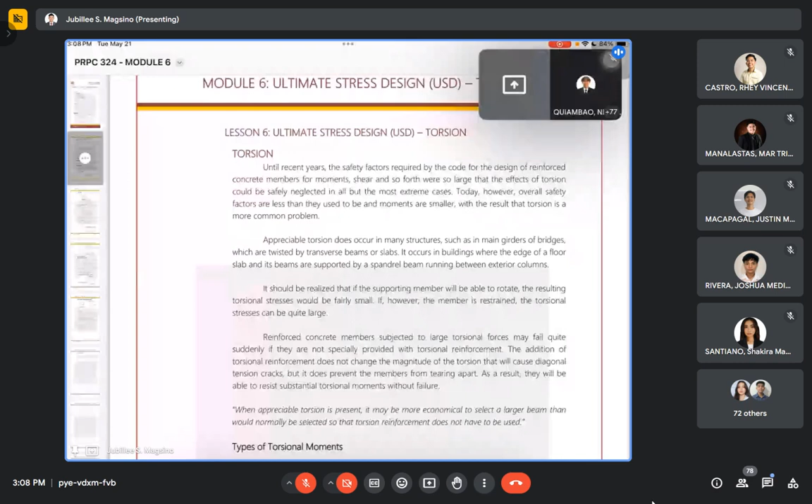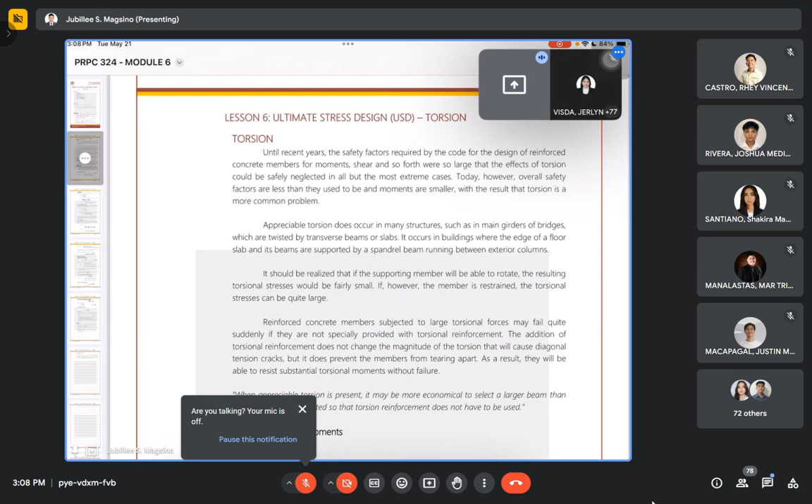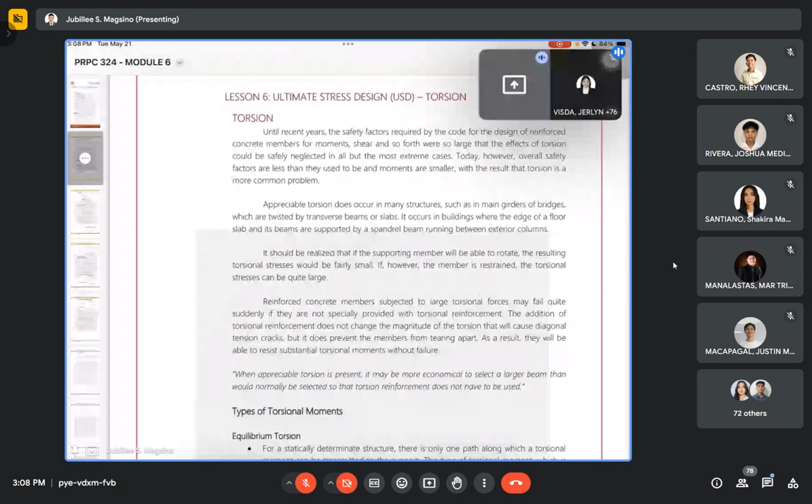Torsion, until recent years, the safety factors required by the code for the design of reinforced concrete members for moments, shear, and so forth were so large that effects of torsion could be safely neglected in all but the most extreme cases. But today, however, all overall safety factors are less than they used to be, and moments are even smaller, with the result that torsion is a more common problem.

Appreciable torsion does occur in many structures, such as in main girders of bridges, which are twisted by transverse beams or slabs. It occurs in buildings where the edge of a floor slab and its beam are supported by a spandrel beam running between exterior columns. It should be realized that if the supporting member will be able to rotate, the resulting torsional stresses would be fairly small. If, however, the member is restrained, the torsional stresses can be quite large.

So ang mangyari class, maglagay man tayo ng torsional reinforcement, hindi naman to magbabago yung value ng ating torsion or tinatawag nating ultimate value of the torsion. So same case lang ng class, ang mangyayari lang po, magiging lang po siyang extra support para kung sakali class mag-fail when it comes into torsional moment, meron pa din tayong support na kung saan makapag-support dun sa atin pong reinforced concrete beam.

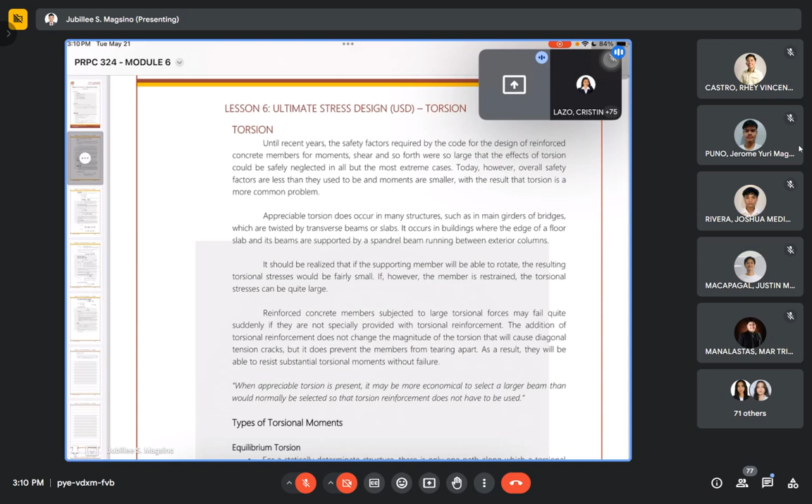We do also have types of torsional moments. So we have equilibrium torsion and compatibility torsion.

So for equilibrium torsion class, for statically determinate structure, there is only one path along which the torsional moment can be transmitted to the support. So this type of torsional moment, which is referred to as equilibrium torsion or statically determinate torsion, in other words, cannot be reduced by redistribution of internal forces or by a rotation of the member. So the member, therefore, must be designed to resist the full calculated torsional moment.

Next, we have compatibility torsion. So the torsional moment in a particular part of a statically indeterminate structure may be substantially reduced if that part of the structure cracks under the torsion and gives or rotates. The result will be a redistribution of forces in the structure. This type of torsion is referred to as statically indeterminate torsion or compatibility torsion, in the sense that the part of the structure in question twists in order to keep the deformations of the structure compatible.

We do also have torsional capacity of a member. Wait lang class.

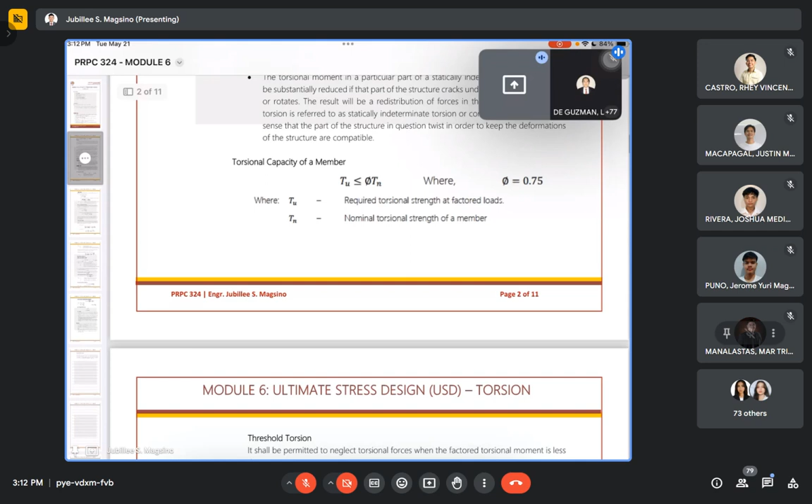Okay, so torsional capacity of a member, so meron tayo dyang TU should be less than or equal to the phi Tn, wherein yung value ng ating phi or yung reduction factor natin is 0.75 din, kagaya lang siya ng ating pong nasa module 5, yung ating pong last discussion. Wherein yung ating pong TU is the required torsional strength at factored loads, o yung tinatawag nating ultimate value of torsional strength. And then Tn, kapag nakakita tayo ng sub na N, basically that's nominal torsional strength of a member.

Next, we have threshold torsion. So sabi dito, class, it shall be permitted to neglect torsional forces when the factored torsional moment is less than. So meron tayong dalawa dyan, class. For non-pre-stress members, so meron tayong value na ating threshold torsion, which is less than or equal to the formula of phi lambda square root of f prime c all over 12 multiplied by the value of ACP squared all over PCP. And for non-pre-stress members naman, class, subjected to an axial tensile or compressive force.

So kung dun sa nauna, class, non-pre-stress members lang siya, wala siyang binanggit if subjected ba siya sa axial or compressive force, ang gagamitin is yung nauna. Pero if sinabi sa problem, class, subjected yan sa ating pong axial tensile or even sa compressive force, gagamitin natin is yung ating pangalawang formula.

So meron tayong TA, should be less than or equal to the value of phi lambda square root of f prime c all over 12 multiplied by the quantity of ACP squared all over PCP multiplied by the square root of the quantity of 1 plus NU all over 0.33 AG lambda square root of f prime c.

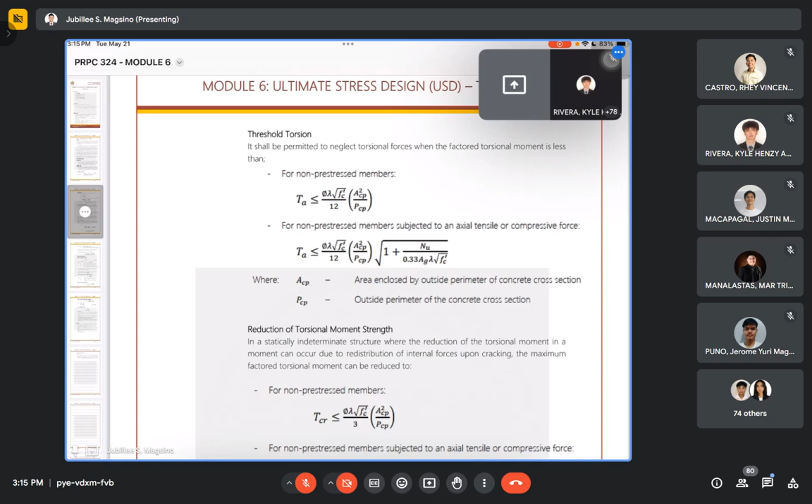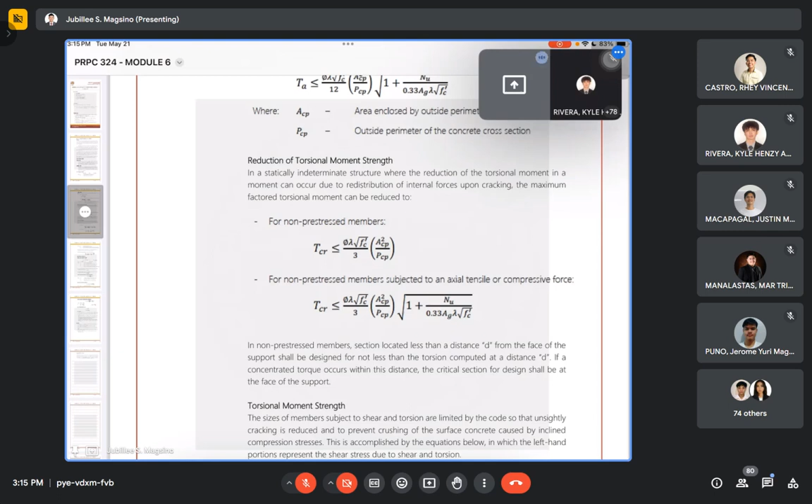Next, the reduction of torsional moment strength. In a statically indeterminate structure, the reduction of the torsional moment can occur due to the redistribution of internal forces upon cracking.

So the maximum factored torsional moment can be reduced to, meron din tayong formula dyan, class. We have for non-pre-stress members, meron tayong TCR should be less than or equal to the value of phi lambda square root of f prime c all over 3 multiplied by the quantity of ACP squared all over PCP.

Tapos kapag naman sinabi sa problem, subjected yan sa ating axial, tensile, or even compressive force, gagamitin natin yung pangalawang formula. So we have TCR should be less than or equal to the value of phi lambda square root of f prime c all over 3 tapos ACP squared all over PCP.

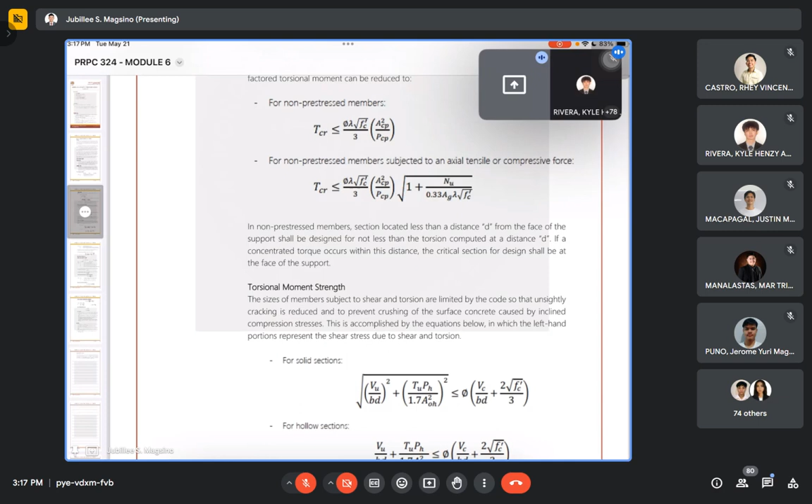Usually, class, dumadagdag lang naman dito is yung value ng square root o yung formula na may square root. Okay? Pero in non-pre-stress members, class, section located less than the distance d from the face of the support shall be designed for not less than the torsion computed at the distance d. So, in a concentrated torque occurring within the distance, the critical section for the design shall be at the face

of the support. Next, we have torsional moment strength. So the sizes of members subjected to shear and torsion are limited by the code so that unsightly cracking is reduced, to prevent crushing of the surface concrete caused by the inclined compression stresses.

So this is accomplished by the equations below, in which the left-hand portion represents the shear stress due to shear and torsion. So ibig sabihin class, itong mga nasa left part, itong mga square root, VU, mga ganyan, yan po ang nagre-represent sa ating pong shear stress due to shear and torsion.

Tapos ikino-compare natin sila sa ating pong quantity na nasa right. So dapat ang mga value na nakuha natin sa left ay hindi lalagpas doon sa value na meron tayo sa right. Okay? Kung lumagpas man sila, ang kukunin nating value ay yung nasa right. Okay? Kung equal man sila, ang kukunin pa rin nating value is yung nasa left.

So for solid sections, class, meron tayong square root of quantity of VU over BD squared plus quantity of TU PH all over 1.7 AOH squared, squared. So it should be less than or equal to the value of quantity of VC all over BD plus 2 square root of f prime c all over 3.

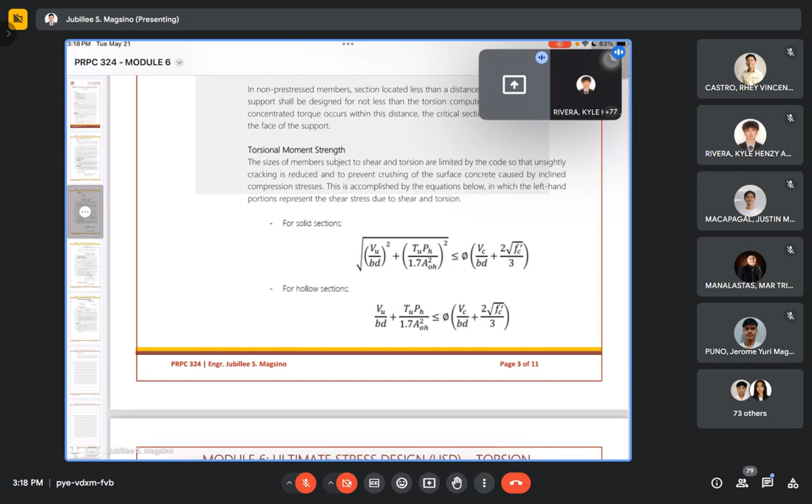So tapos meron din tayo for hollow sections. So for hollow sections naman class, ang parang nagbago lang, tatanggalin mo yung square root at saka yung pagkaka-squared. So parang ganun lang.

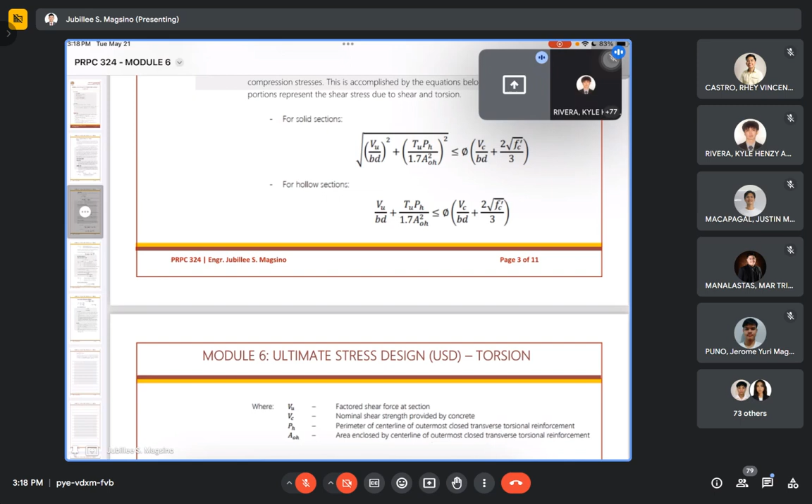Wherein, yung ating pong VU dito, a factored shear force at the section or yung ultimate value ng shear. Tapos nominal shear strength provided by the concrete, VC pa rin yon. Tapos pag may nakita kayong VN, that is nominal value of shear strength.

Pagkatapos naman class, dito naman po, we have the perimeter of centerline of the outermost closed transverse torsional reinforcement. And then yung ating pong AOH, it's the area enclosed by the centerline of the outermost closed transverse torsional reinforcement.

So paano nga ba yung class? Sige, try natin. So halimbawa, meron tayong... yan pangit.

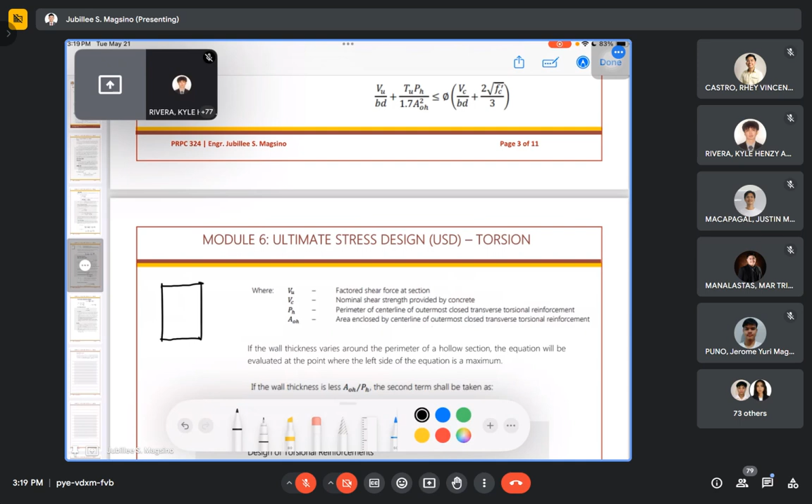So meron tayong, kunyari, height ni beam, sabi ko kanina it's 700. Tapos yung ating pong width ni beam is 400 mm.

So paano nga ba natin makukuha yung pH? Paano ba natin makukuha yung AOH? Halimbawa, ang binigay na value ng ating pong concrete cover is 100 mm. So ibig sabihin class, draw tayo ng ganito. Meron tayong concrete cover dito sa ating side, sa ating taas, and side dun sa baba.

So ibig sabihin, this is both 100 mm. So ililes natin yan sa ating 700. Ang matitira na lang dito sa gitnang part natin, it's 500 mm. Next, ganun din sa ating pong base, tig 100 din to class. So ibig sabihin, ito na lang class ay 200 mm.

So paano nga ba natin makukuha yung pH? Gaya lang ng formula natin kanina, sa pH class, si pH makukuha yan 2 multiplied by, paano to class? Kung kanina buo class, pagdating po kay pH, i-consider na lang natin is yung nasa gitna. Ibig sabihin, makukuha natin si pH 2 multiplied by 200 plus 500. Ganyan natin makukuha si pH.

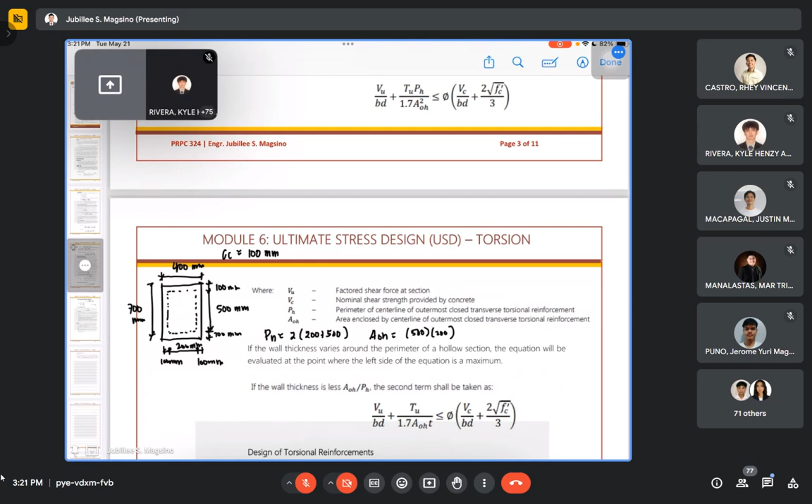Take note, class, that if the wall thickness varies around the perimeter of a hollow section, the equation will be evaluated at the point where the left side of the equation is maximum. So if the wall thickness is less, AOH over pH, the second term shall be taken. Kung ang value po ng ating pong quantity ni AOH all over pH ay ang tawag doon na maximum,

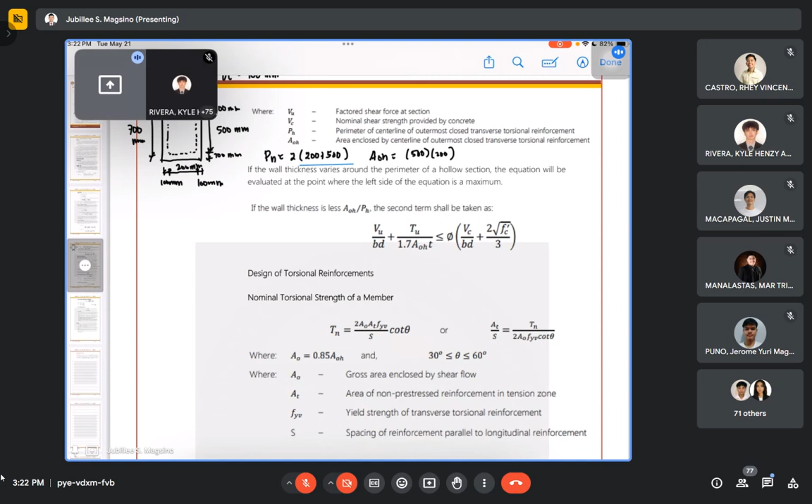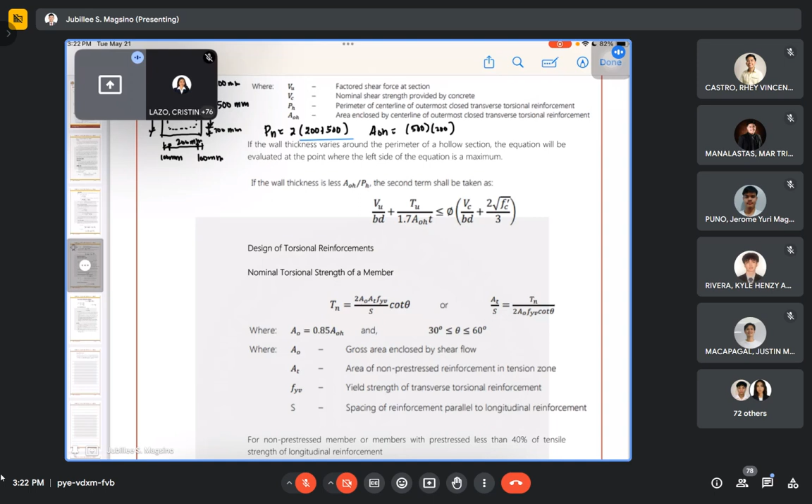Ang gagamitin natin classes yung ating VU over BD plus TU all over 1.7 AOHT. It should be less than or equal to the value of phi multiplied by the quantity of VC over BD plus 2 square root of F prime C all over 3.

Next, pagdating naman sa design class, meron din tayong consideration dyan class. So we have design of torsional reinforcement. We have nominal torsional strength of a member, yung ating pong TN.

Ang formula natin dyan class, we have 2AO multiplied by AT FYV all over S multiplied by cotangent theta. Or pwede natin makuha yung class, i-rearrange lang natin AT all over S equals to TN all over 2 AO FYV cotangent theta. Okay? Wherein yung value ng ating pong AO, it should be 0.85 AOH.

So makukuha natin yung AO natin class, kinakailangan muna natin kuhanin yung value ni AOH. Right after natin makuha yun, i-multiply lang natin, i-reduce lang natin into 0.85 or 85%, makukuha na natin yung AO. Yun yung tinatawag natin gross area enclosed by the shear flow.

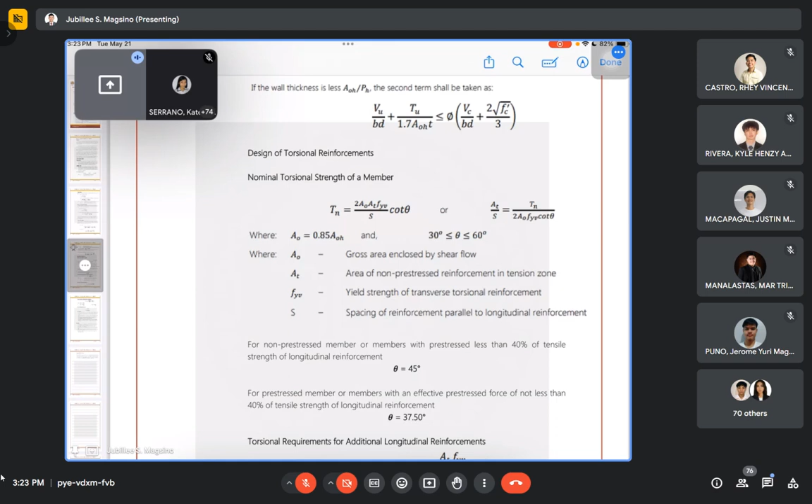Take note, dapat yung ating pong theta is between the value of 30 degrees and 60 degrees, hindi siya bababa sa 30, hindi rin siya tataas sa 60. Dapat nandun lang siya sa range na iyon. At AT, it's the area of the non-pre-stress reinforced in tension zone. FYV, yield strength of the transverse torsional reinforcement. At S, kagaya lang ating shear class, we have spacing of reinforcement parallel to longitudinal reinforcement.

So meron din tayong value ni theta dyan class. For non-pre-stress members or members with pre-stress less than 40% of tensile strength of longitudinal reinforcement, ang gagamitin nating value ni theta is 45 degrees. Pero if ang ating pong member is pre-stress member or member with an effective pre-stress force of not less than 40% of tensile strength of longitudinal reinforcement, ang value ni theta is 37.50 degrees.

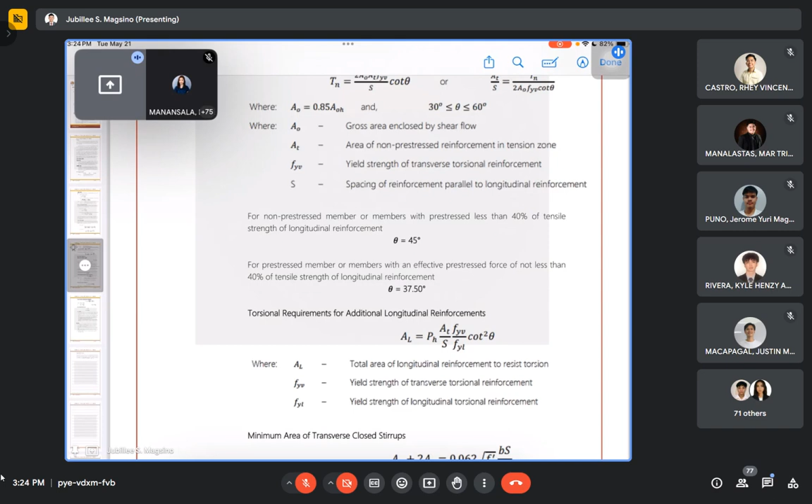Next, we have torsional requirements for additional longitudinal reinforcement or yung tinatawag nating value ni AL. AL is equal to PH AT over S multiplied by FYV all over FYL cotangent squared theta. Yung AL natin class, that will be the total area of longitudinal reinforcement to resist torsion.

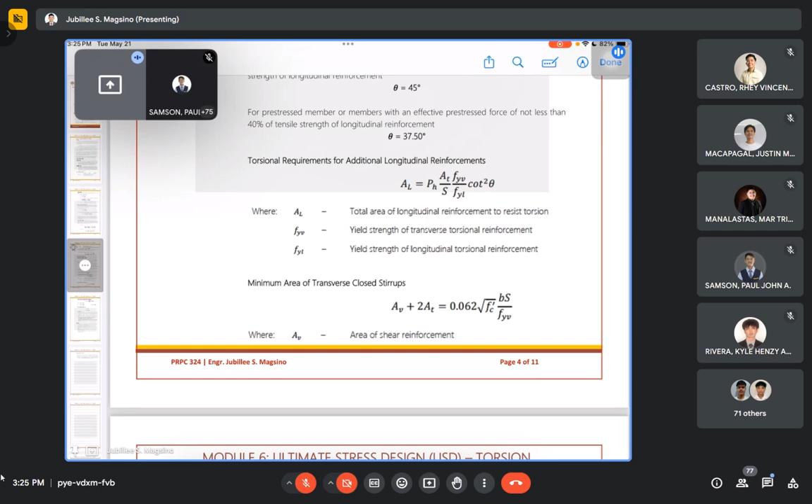Tapos yung FYV, same pa din class. At yung FYL, nadagdag natin class, yield strength of longitudinal torsional reinforcement. Kumbaga ito yung parang kung doon sa ating pong FYB, kino-consider natin doon is the transverse. Pagdating kay FYL, it's the longitudinal torsional reinforcement. At meron din tayong tinatawag na minimum area of transverse closed stirrups.

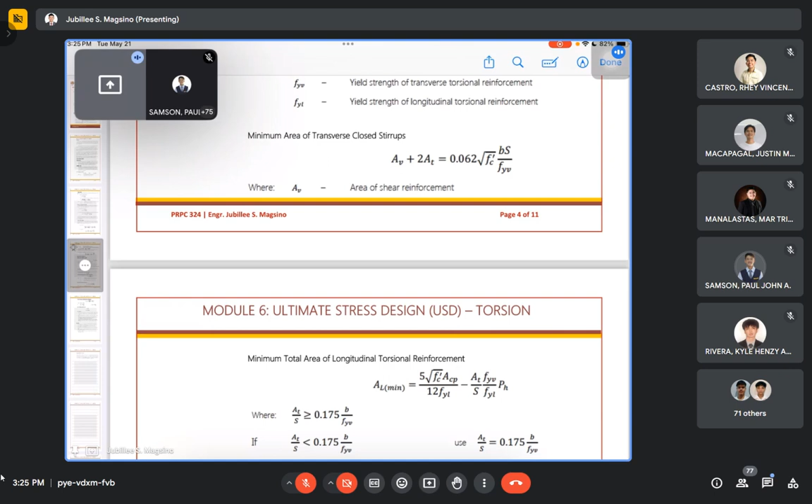We have AV plus 2AT over S is equal to 0.062 square root of F prime C times BS all over FYV. AV is the area of shear reinforcement. And then we have the minimum total area of longitudinal torsional reinforcement.

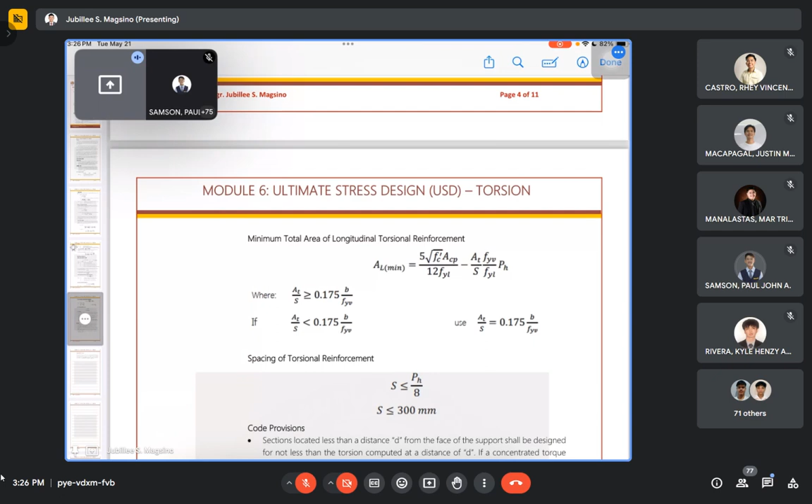So we have AL min is equal to 5 square root of F prime C multiplied by ACP all over 12 FYL, minus the quantity AT over S multiplied by PH, multiplied by FYB over FYL. Wherein the value of AT over S should not be less than 0.175 B over FYV. But in case it becomes lower, what we use is the value of 0.175 multiplied by B over FYV, just in case our AT over S becomes lower.

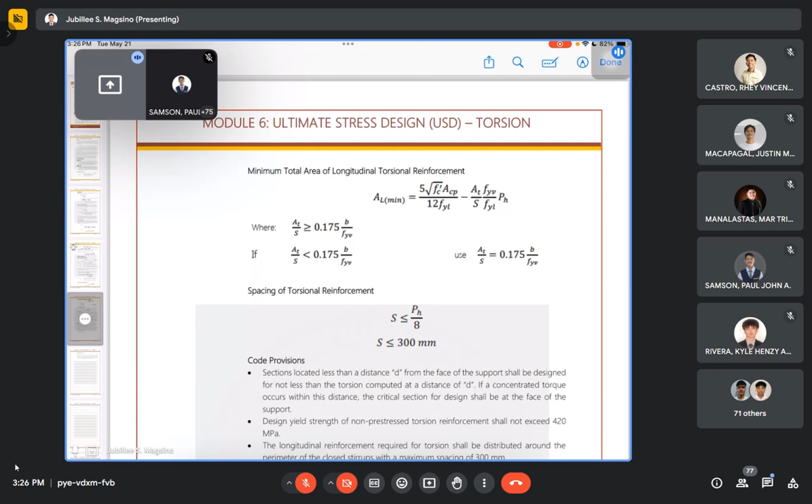And then lastly, for spacing of the torsional reinforcement, we only have two conditions: S is equal to PH over 8, and S is equal to 300 millimeters. Unlike in shear where we solve for several values and pick the smallest as our maximum spacing, for torsional reinforcement we only have two: PH over 8 and 300 millimeters.

So we have two sample problems under torsion. For today, let's discuss example number 1.

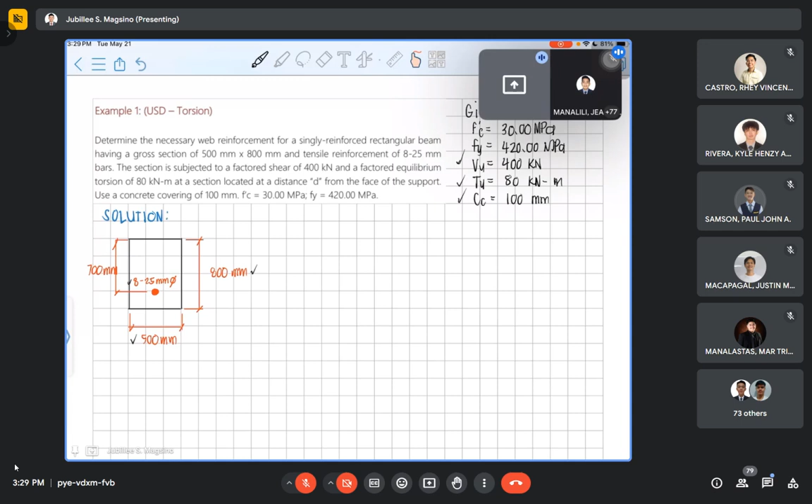So use a concrete covering of 100 millimeters. So we are given our CC which is 100 millimeters. We're also given F prime C which is 30 megapascals, and Fy which is 420 megapascals. What are we asked to find? We have to determine the necessary web reinforcement for a singly reinforced rectangular beam.

Necessary web reinforcement means what we need to find is the value of web reinforcement, or the value of our S. So let's proceed with the solution. Let's start with step 1.

So for step 1, class, we have to first check the shear reinforcement. So how can we solve or check our shear reinforcement? What do we usually solve first when it comes to shear reinforcement?

This is always the first thing we solve, class, the value of VC. VC, right? Wherein our formula is 0.17 lambda square root of F prime C BWD.

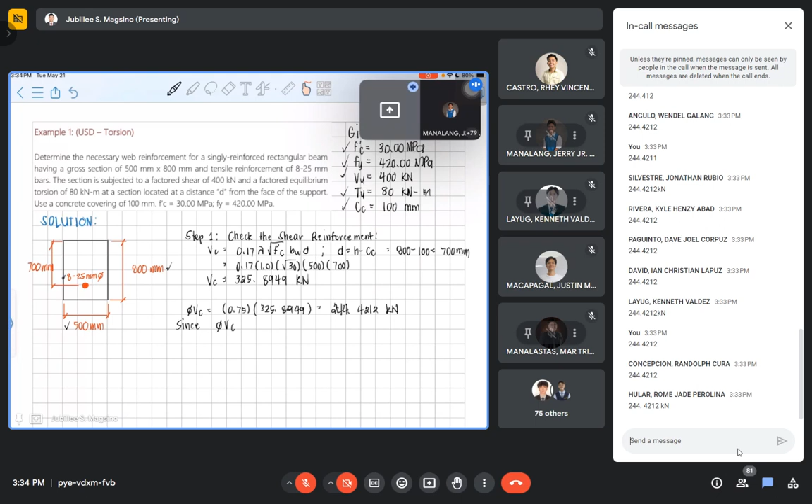Since φVc is less than Vu, tama? Mas mataas si VU, 400, kaysa sa kay φVc na 244. Therefore,

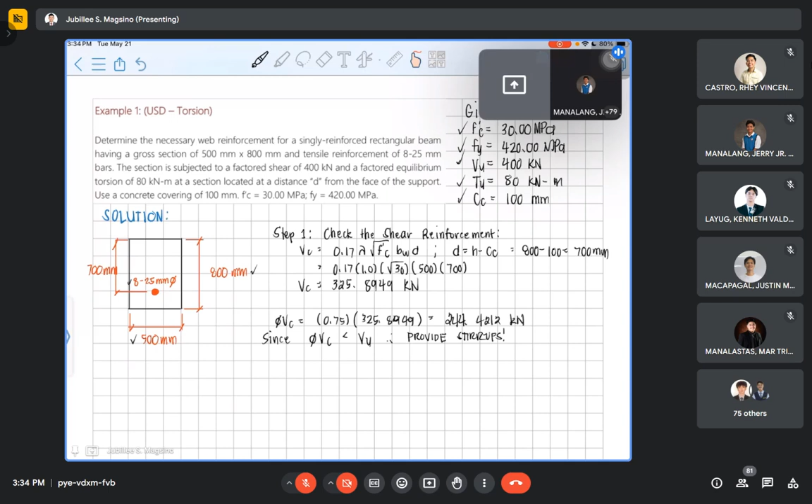provide stirrups. Okay? Natatandaan pa, class? So after step 1, class, kapag na-check na natin if kinakailangan natin ng stirrups, then proceed tayo with step 2.

Okay? So kay step 2 naman, class, okay. For step 2, after natin ma-check kay shear reinforcement, i-check naman natin siya kay torsional reinforcement. So check for torsional reinforcement. Pero paano nga ba natin ma-check yung kanyang torsional reinforcement?

So sisolve muna natin, class, yung value ni ACP at saka ni PCP. So we have ACP. Paano nga ulit makuha si ACP? It's base times height, tama?

Ano ba ang base natin? 500. Ano ba ang height natin? 800. So ano ang value ni ACP natin, class? Yeah, it's 400,000 mm squared. That's area, ha?

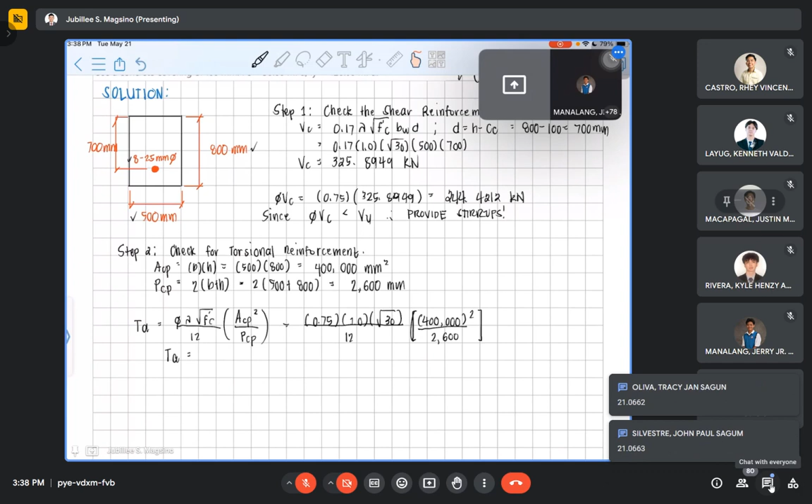21.0663. It's 21.0663. Tanong, ano ang unit? Kilonewton meter. Okay?

So i-compare natin yan sa value ni TU, which is 80 kilonewton meter, tama? Since TU is greater than the value of your TA, which is 80 kilonewton meter, greater than the value of your TA, which is 21.0663 kilonewton meter. Therefore,

provide torsional stirrups. Okay? So na-check na natin siya under shear, tapos na-check na natin siya under torsional, tapos nalaman natin kailangan ng stirrups.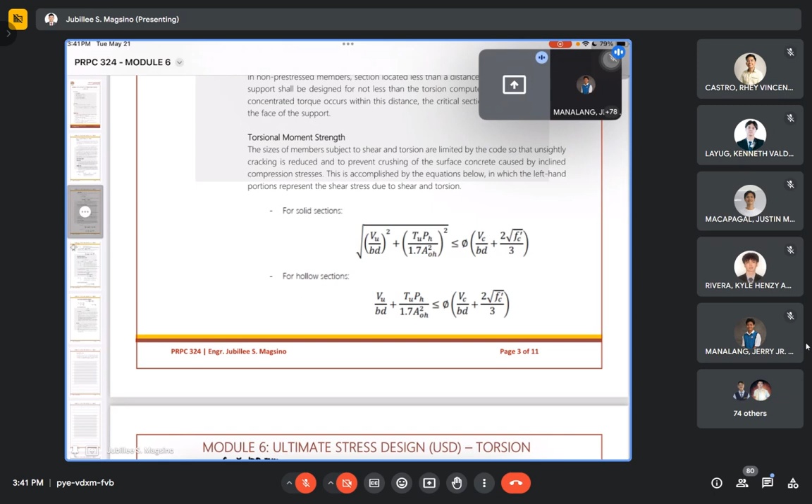Balik tayo dito, class. Yan. Torsional moment strength. Solid ba or hollow? May binanggit ba sa problem na hollow tayo? May binanggit ba sa problem na solid tayo? So upon reading the problem, class, wala siyang binanggit, it's either solid or hollow. So ibig sabihin, in other term, nasa solid section tayo. So since nasa solid section tayo, ang gagamitin natin is for solid sections.

Tama? So gagamitin kong formula niyan is yung naunang formula, which is for solid sections. Which is square root of VU all over BD squared plus TU, pH, all over 1.7 AOH squared, tapos may squared, greater than or equal to VC all over BD plus 2 square root of F prime C all over 3. Okay? So kung papansinin natin, class, meron tayong pH at saka AOH dito sa formula.

So kinakailangan muna natin silang kunin. So paano na ba natin kukunin yon? So halimbawa, yan yung beam natin. So meron tayong height ni beam which is 800. Tapos meron tayong width ni beam na 500. So kunin natin yung nasa loob.

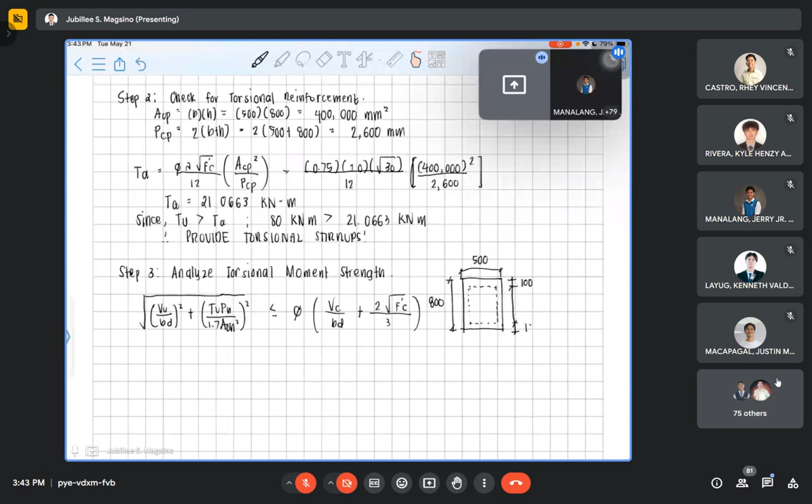Tapos deduct natin yung ating pong concrete cover na 100. So meron tayong 100 dito, meron tayong 100 dito. Same as true with our width. Meron tayong 100 dito, meron tayong 100 dito. Ibig sabihin, meron na lang tayo dito 600. Tapos dito meron tayong 300.

So kunin natin si AOH. Para makuha si AOH, we have to multiply 300 kay 600. So meron na tayong value ni AOH which is 180,000 mm squared. How about si pH?

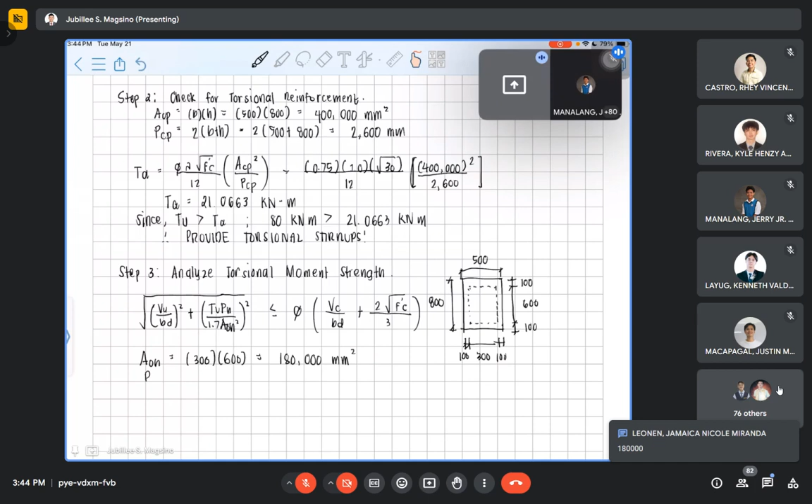So pH, class, 2 multiplied by 300 plus 600. So ano ngayon ang value ni pH? 1,800 mm. And take note, class, na since nag-reduce tayo ng concrete cover, automatically ang value ni ACP at ni PCP is always larger than the value of your AOH and pH. Okay? Next.

So, substitute tayo ng values. So, square root of VU. Ano ang VU natin? 400 kilonewton, tama? Since naka-mm tayo class, convert natin yung mga naka-kilonewton into newton. So, 400 times 10 raised to 3. Tama? From kilonewton, gawin natin newton, multiply ng 1,000. All over base, 500 times your depth which is 700. Huwag tayong papalito ha, baka ang nilagay niya dito height, the depth which is 700 squared plus yung ating value ni TU.

So, TU torsional moment yan. So, ibig sabihin under kilonewton meter. So, convert natin yan into newton mm. So, magmumultiply tayo ng 1 million. Tama? Times 10 raised to 6. So, we have 80 times 10 is to 6. Tapos, multiply natin yan kay pH which is 1,800 mm. All over 1.7. Tapos, multiply natin yan kay 180,000 mm squared. Okay? Tapos, naka-squared pa yan.

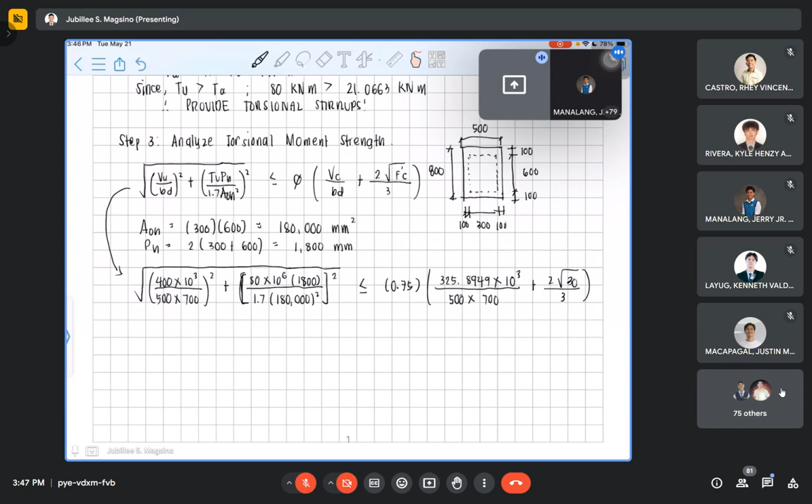Here. So, ano ang value ng ating nasa left side, class? Ano ang value ng ating nasa left side? 2.8533. So we have 2.8533. How about yung ating nasa right side? Kailangan mapatunayan natin yung nasa right side natin mas mataas kumpara dun sa value ng ating nasa left side. 3.437. 3.4369. 3.4. It's 3.4369. So, ibig sabihin, class, therefore,

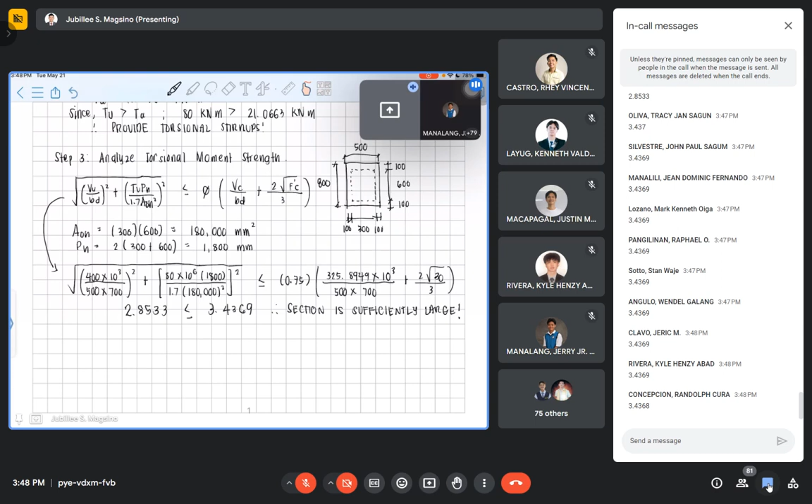Section is sufficiently large. Ibig sabihin, kaya nang i-handle yung ating pong value ni ultimate torsional strength. Okay? So, done tayo with step 1, step 2, and then nag-analyze na din tayo ng torsional moment strength, and then napatunayan natin that section is sufficiently large. Proceed tayo with step 4.

And step 4 tayo, class. Under step 4, we have to identify the required area of torsional reinforcement. Identify the required area of torsional reinforcement. So, paano nga ba yung class? Meron tayong formula doon, tama? Kung babalikan natin, ito yun. Ito yan. Yeah. We have Tn is equal to 2AO AT FYV over S cotangent theta.

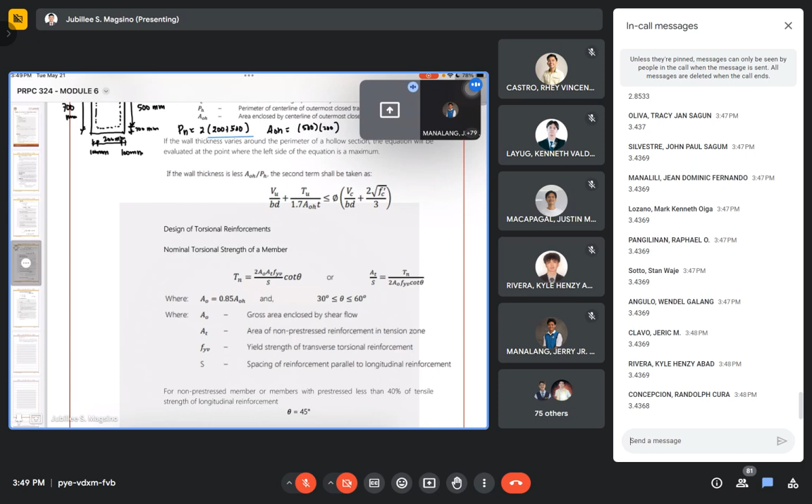So, yan yung gagamitin natin. So, we have Tn is equal to 2AO AT FYV all over S tapos cotangent theta, or we have AT all over S is equal to Tn all over 2AO FYV cotangent theta. Okay.

So, kuhanin muna natin ang value ni Tn. Tama? Kasi walang given na Tn. Pero alam ko, pwede natin makuha si Tn kasi meron tayong given na Tu. Kasi kung titingnan natin, kung meron tayong Vu, yan, kung meron tayong Vu is equal to φVn, it also applies with Tu is equal to φTn. Tama? And then to solve for your Tn, ang gagawin lang natin, we have to divide Tu sa ating pong φ, which is yung reduction factor natin. And meron tayong Tu, tama? That is 80 kilonewton meter all over 0.75. So, ibig sabihin, kayang-kaya natin kuhanin si Tn, which is 106.667 kilonewton meter.

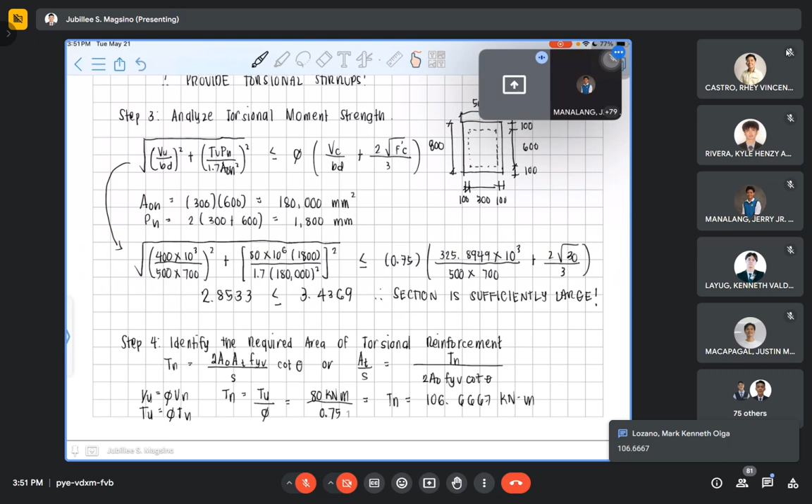So basically, meron na tayo lahat given. So pwede na nating masolve yung area of the torsional reinforcement. Tama? Ayan. Continue natin dito, class. Next naman natin kunin is yung isa pang unknown. Si AO pala ay unknown pa kasi ang nakuha pala natin kanina is the AOH.

Tama? Pero may binigay ang ating formula na para makuha natin ang ating value of your AO is we have to reduce it 85%. So, ibig sabihin, to solve for your AO, you have to multiply 0.85 kay AOH. 0.85 multiplied by 180,000 mm squared. So, ano ngayon ang value ni AO? It's 153,000 mm squared. Okay?

And since kinakailangan din natin ng value ni theta dito, walang ibinigay na specific ang problem. So para safe tayo class, always use the value of your theta or assume that the value of your theta always is equal to 45 degrees. Okay? Wait lang class, tumutulo na yung wait lang. Okay.

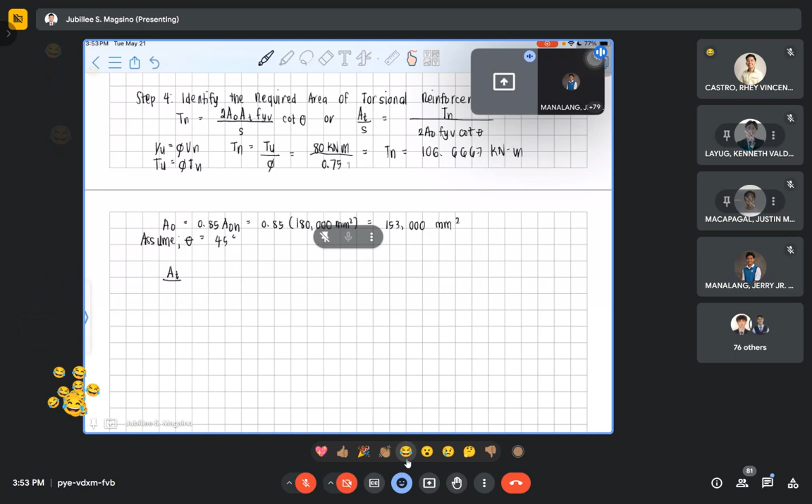So, pwede nating makuha yung class. Gamitin natin yung AT over S. Woo! AT over S is equal to the value of your Tn all over 2 AO FYV cotangent theta.

So AT over S equal yan kay Tn. Ano ang Tn natin? 106.667 times 10 raised to 6 kasi ko-convert natin yan into Newton mm. All over 2. Ano ang AO natin? 153,000. Ano ang FYV natin? Meron bang binigay na FYV? Wala. So, ibig sabihin, our value of Fy is equal to the value of your FYV. That is 420 MPa. And then, cotangent, 45 degrees.

Now, we have the value of our AT over S. And that is 0.8. Ano ang value ng ating AT over S? About yung iba class. 0.8 something yan, alam ko. Baka ni-radian yung calculate nyo, ha? It's 0. Naku, mukhang alam ko na saan kayo magkakamali. Ito sa step 4.

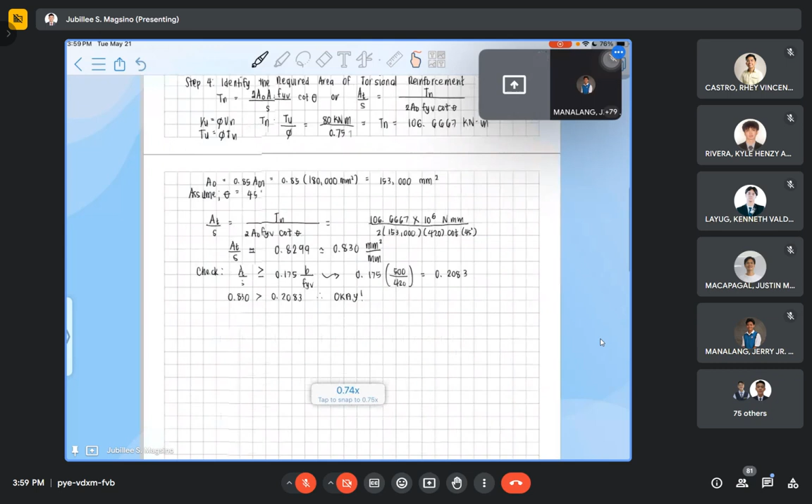Okay, kapag okay na yan class, another step na naman tayo. Step 5 tayo. After class, kapag nakuha na natin yung area of torsional reinforcement, kunin naman natin yung area of shear reinforcement. Okay, identify the required area of shear reinforcement.

Kunin muna natin yung value ni VS, tama? Kasi kumukuha tayo ng value of the required area of reinforcement. Kasi para makuha ang VS, meron tayong formula ni VU is equal to phi VN. And then yung VN na to, equal yan sa tinatawag nating VC plus VS.

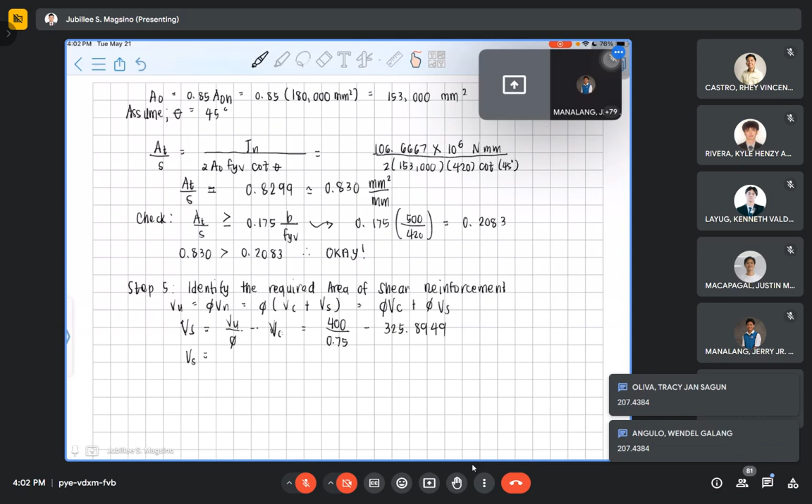Tapos i-rearrange natin yan, class. So magkakaroon tayo ng VC plus VS. Tapos kunin natin si VS. Si VS equal yan kay VU over phi minus VC. Substitute natin yung values: 400 all over 0.75 minus 325.8949. So ano ngayon ang value ni VS? 207.4384.

Kunin natin ang value ni AV over S. So paano natin makuha si AV over S? Meron tayong formula ni VS, tama? VS is equal to AV FYV D all over S. Tama? So i-rearrange natin class para makuha natin si AV over S. So we have AV over S is equal to VS all over FYV times D. Tapos substitute lang natin ang value ni VS, FYV, at D. Makukuha natin si AV over S. So ano ang VS natin?

200... 207.4384 times 10 raised to 3 para maging Newton, all over FYV. Ano ang FYV natin? 420 multiplied by the depth which is 700. So ano ngayon ang value ni AV over S? 0.7056 mm squared over mm.

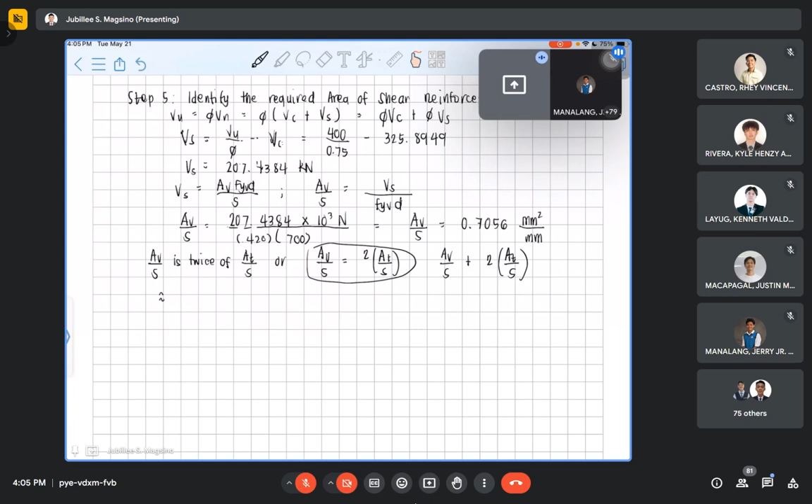Okay? So gawin natin yun, class. We have AV over S, anong value yun? 0.7056 mm squared over mm, plus twice ng ating AT over S. Ano ang ating AT? 0.830 mm squared over mm. So ano ang value natin, class? 2.3656.

Yan. And then pag nakuha na natin to, class, doon pa lang tayo pwede mag-proceed kay step 6. Okay, step 6. So for step 6, class, we have to design the torsional and shear reinforcement. May sinabi bang bakal? May sinabi bang size ng bakal? So ano ang gagamitin natin yan, class?

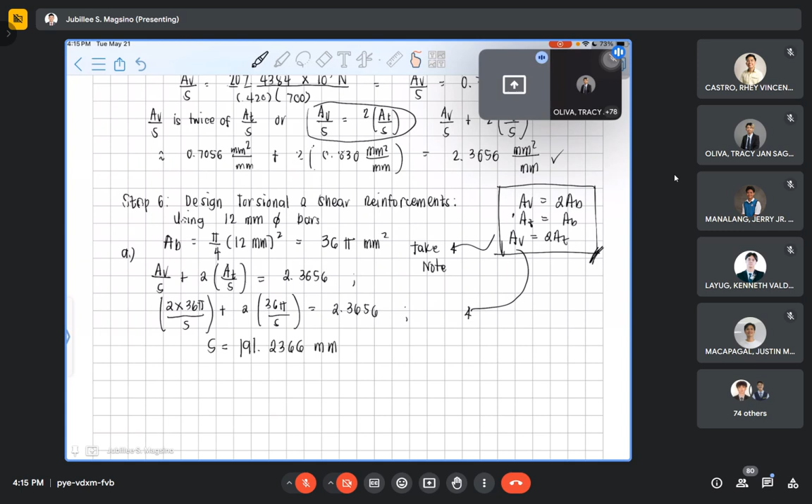Yan, so for ano, kuha nating S, it's 191.2366 mm. That's for our letter A. Tapos meron pa tayong B, tama? Meron pa tayong C. O sabi ko kanina, dalawa lang, tama?

I-add natin sila dito. So yung B natin, yung ating S is equal to PH over 8. Tapos yung C natin is equal to S is equal to 300. So ano nga ba ang PH natin? 1,800 over 8. Ilan to? 225.

Compare tayo dyan, class: 191, 225, 300. Ano ang ating minimum value? Therefore, S is equal to 191.2366 mm. Round down tayo. Spacing, 190.00 mm. Yan yung value ng ating S.

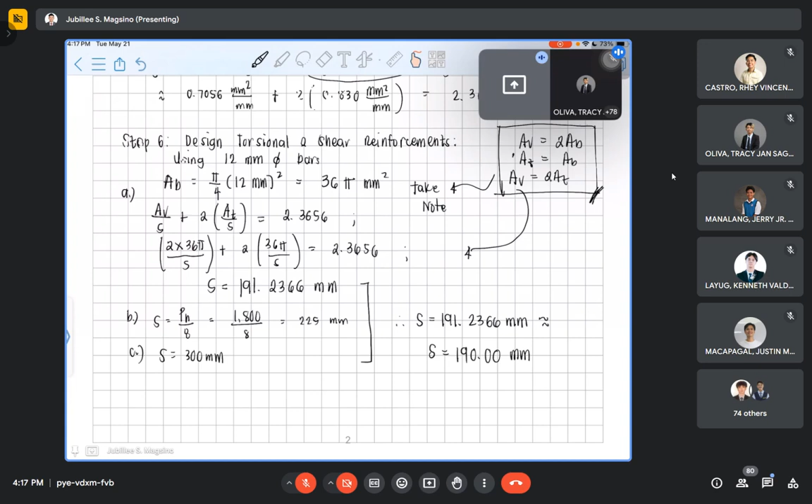Pero kailangan muna nating i-check if adequate ba yung nakuha nating value ng ating stirrup. And that is for our step 7: check the adequacy of transverse close stirrups.

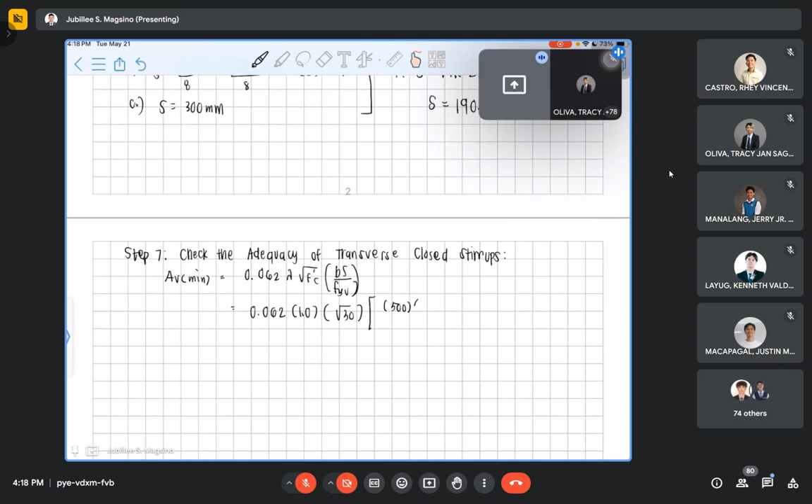Okay, kunin natin dito yung tinatawag nating AV min. We have the formula 0.062 lambda square root of f prime c, bs, all over fyv. So we have 0.062, 1.0, square root of 30, 500 multiplied by 190 (yung naka-round na value ni S na ang gagamitin, class), all over 420. So ano ngayon ang value ni AV min?

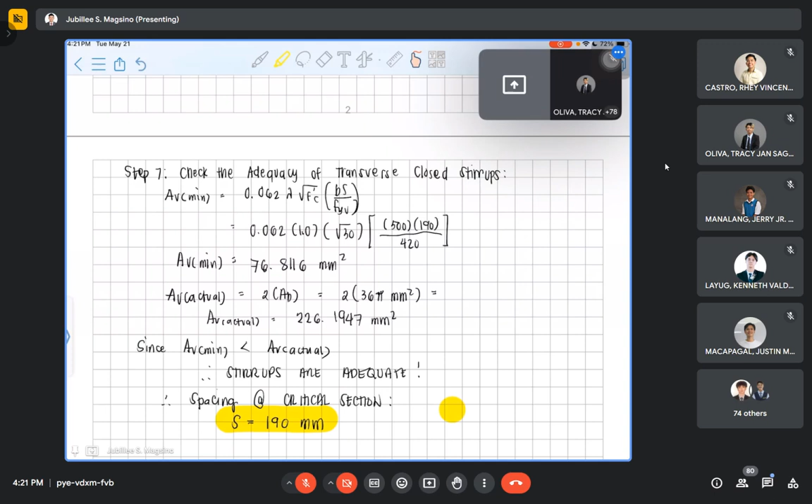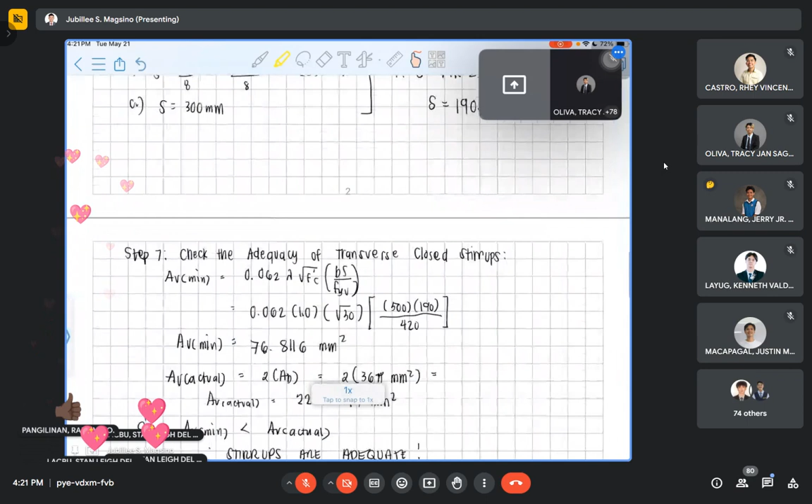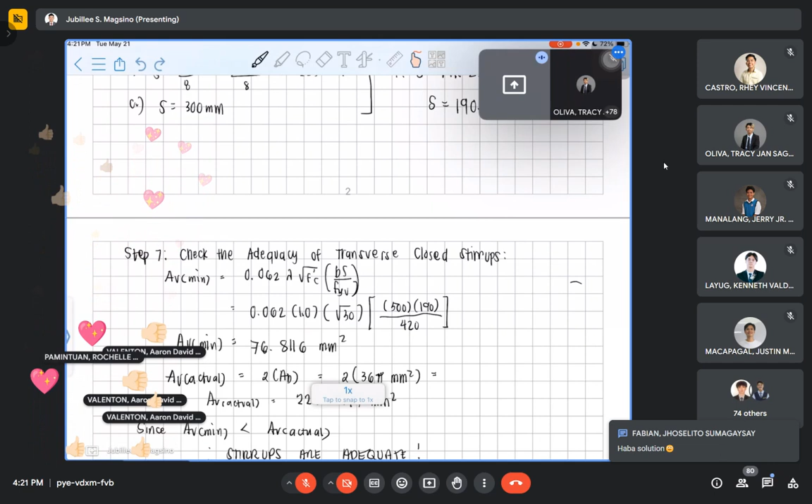Nakasunod? Medyo madami lang steps, mahaba yung solution. Mas mahaba din yung problem to eh.

Doon sa diameter ng bar, sir, pag hindi given, 12 mm na lang po laging gagamitin? Hindi, gamitin 10, 10 pa din. Gusto ko lang i-try yung 12. 10 lagi po, sir? Din, pero bibigay ko na lang para pareho pa din. Tapos, send ko na lang yung solution, PDF ko yan.

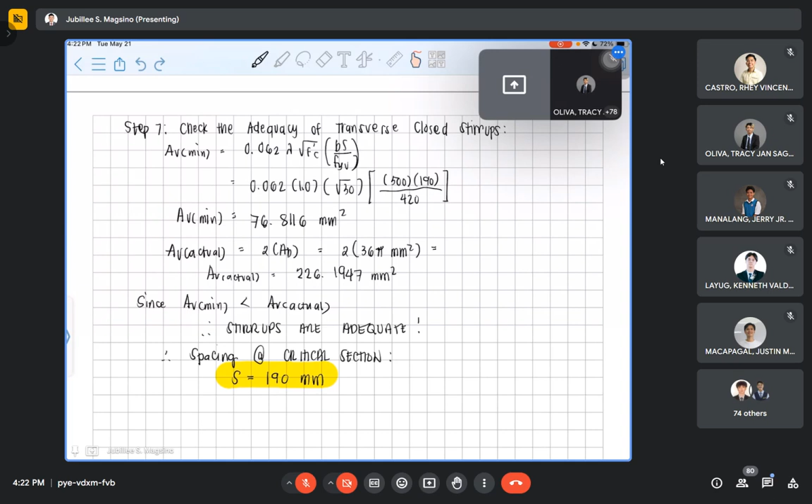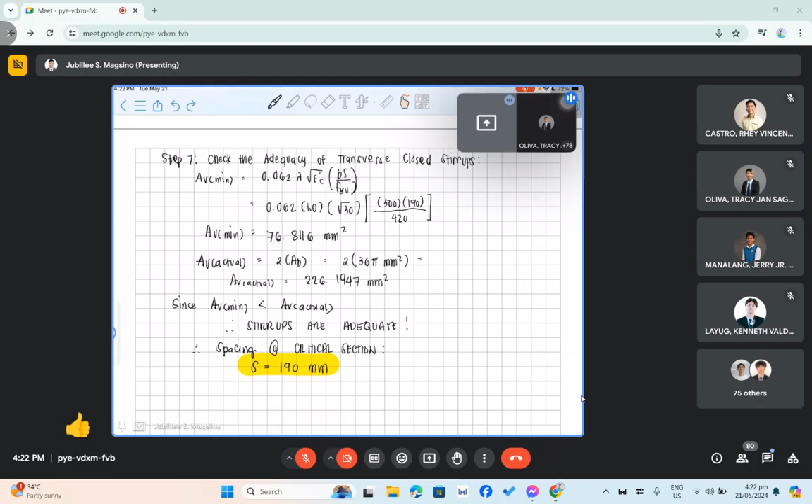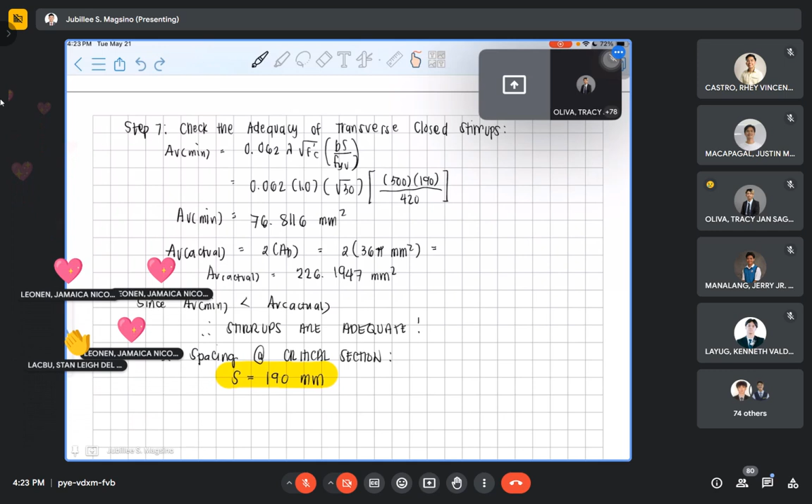Questions, class, concerns, clarifications. Kailan po quiz, sir? Pag natapos... Kaya ba this week? Baka kaya this week, kasi bukas discuss natin yung sample 2, tapos na tayo na. Sa Friday siguro. Kakatapos ko lang i-check yung quiz 1 niyo. Medyo mahaba lang yung solution talaga.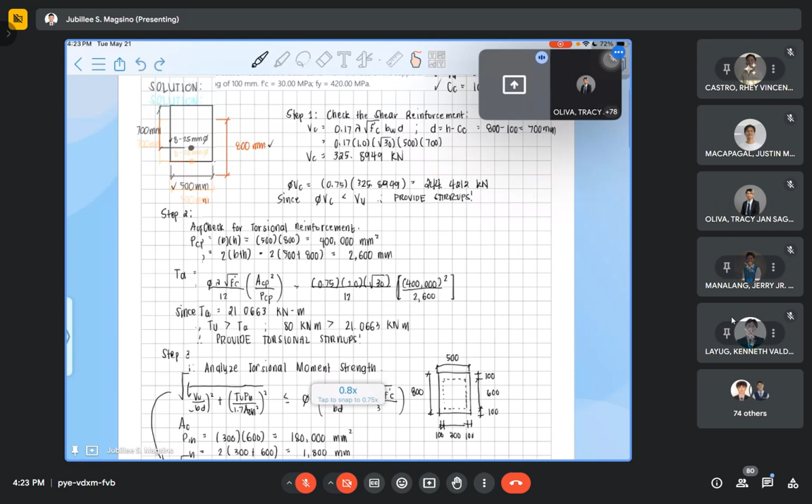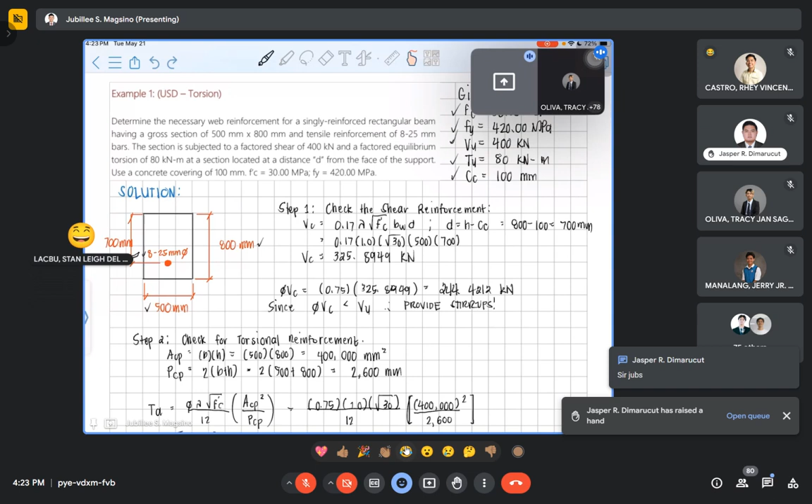Ay, hindi man halatang mahaba. Yes po, Sir Jazz. Ano oras ka Friday? Ay, magka-quiz ka din Friday? Or hindi naman, or may papalit. Mag-quiz ka Friday? Totoo, para ma-adjust ko submission. Yung akin, 3 to 4:30 yung quiz. Okay, sir.

I hope you enjoy the discussion.

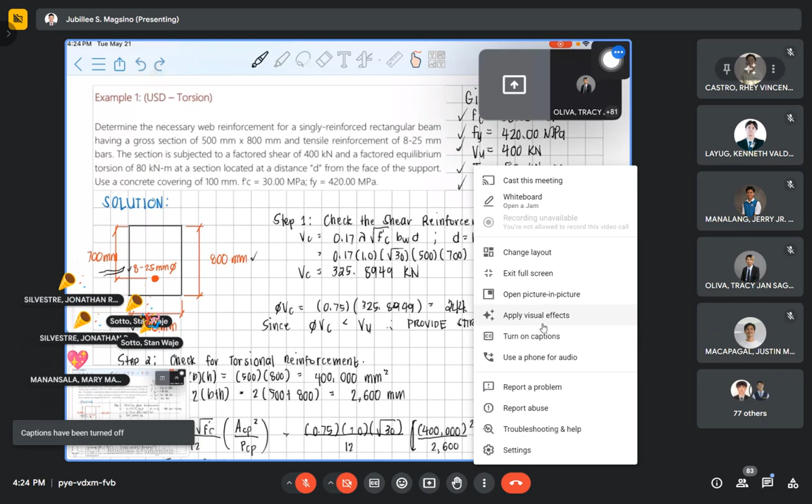Questions, class? Ano yun, Erwin? Bakit may 226 something? Ngayon lang na-send.